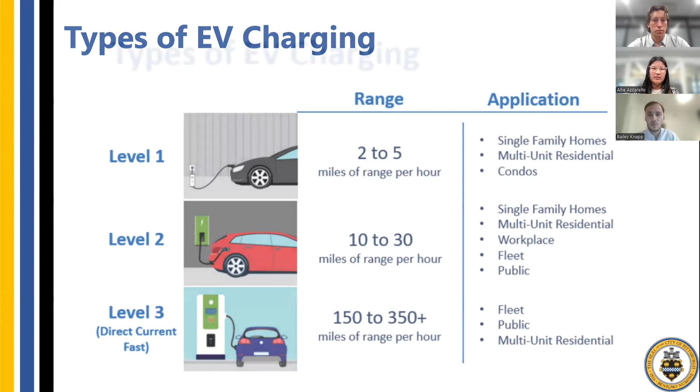We have a charging program and fleet service that we give out to Duquesne Light customers, and we work to partner with governments and community organizations. Our program is really built to cover a lot of the infrastructure costs related to actually doing these charger station programs, and this is the partnership we have with the city of Pittsburgh here. On the CFI grant that was done, we provided match dollars on a certain amount of projects, and then for the whole total we're providing technical support and project management for the rest.

Regarding the charger speeds, the level 1s are very slow charging, 2 to 5 miles per hour. I like to say it's the same power that comes to charge your phone or use your toaster in the morning. Then you really kick up to those level 2s. Those are the ones you'd actually have an electrician come out and install in your house. That's more of an upgraded power, and this is what we would be looking to actually install at the Oakland site here.

I looked at other charger stations also in the area, and a lot of them are 7.2 kilowatts, which is about overnight, like 8 to 9 hours of charging. You see them really in the UPMC hospitals in the area, and then also the parking garages have them. I didn't see many accessible open ones to the general public, except maybe over by the botanical gardens. I might need to fact check this, but I think we're looking at 19.2s for this area, so these will actually be one of the faster community chargers and open to the whole public in the area.

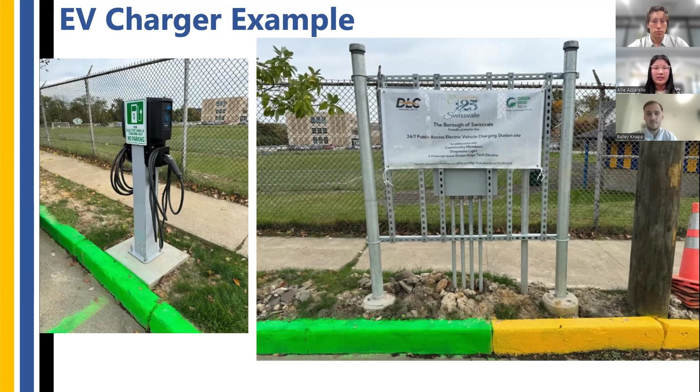Some other pictures on the left, examples of what the chargers could look like in a parking lot, like some of the park locations that we have, or the PPA surface lots. In these pictures too, you can see just a general idea of what the charging stations look like. They're pretty tall, but they're slim.

The picture on the left is an example of the type of charger we are looking at installing for the CFI project. Again, you can see the dual ports on it, charging 2 cars at once. And these chargers are about 6 feet in height.

Okay, over to me. Thank you, Allie and Bailey. So then the next question is how did we choose these locations to install and apply for the grant?

At the time of writing the grant, it was under the Biden administration's built infrastructure plans, and there was a lot of focus on equity. So these are some maps showing inequity measures within our city. We had to overlay that with existing charge ports, using a website called plugshare.com, a free community-sourced website that shows all the chargers within your region. Overlaying that with these equity measures, as well as the federal equity measures for Justice 40 neighborhoods, we determined we needed to hit a certain percentage—I think it was 40%—in Justice 40 areas. That's how we came up with our distribution.

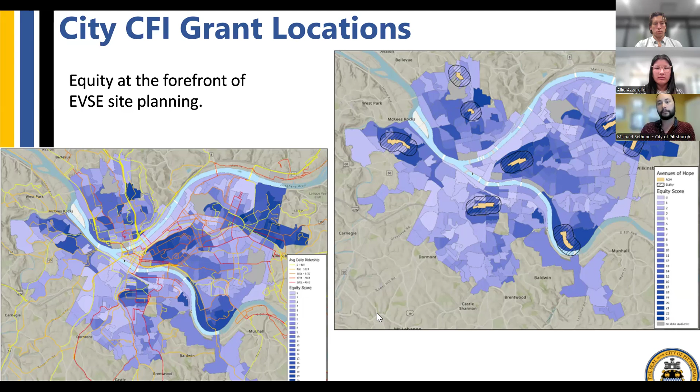Next slide, please. Sorry, I don't know what happened. Okay, sorry. Oh, there we go.

Those lots in particular were chosen because they don't have boom gate access. Essentially, the grant said you need to be able to drive in and up to a charger 24/7, 365 days a year. Obviously, surface lots without a boom gate allow for that.

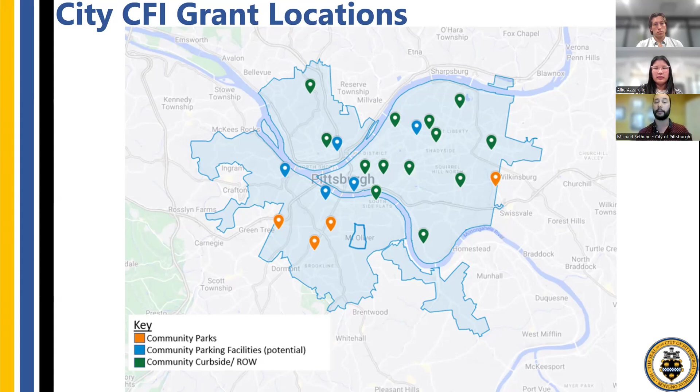Next slide, please. This is, again, in partnership with Duquesne Light, who identified feasible transformers around the city. This site was chosen—it hit a lot of the other grant ideals, public use, public access, and also importantly, it had the pre-built infrastructure, the transformer, right there ready to go.

Next slide. That was the end of the majority of our presentation, but I just wanted to quickly mention PGH 2050, which is Pittsburgh's first ever citywide comprehensive plan. This plan expresses a holistic, community-wide vision for the city's future. It helps city government and its citizens plan for and guide how the city grows and makes improvements, and develops goals and policies related to the range of land use, city services, and quality of life topics. This plan is grounded in climate justice and just transition principles, and we're aiming to proactively better Pittsburgh for all of its residents.

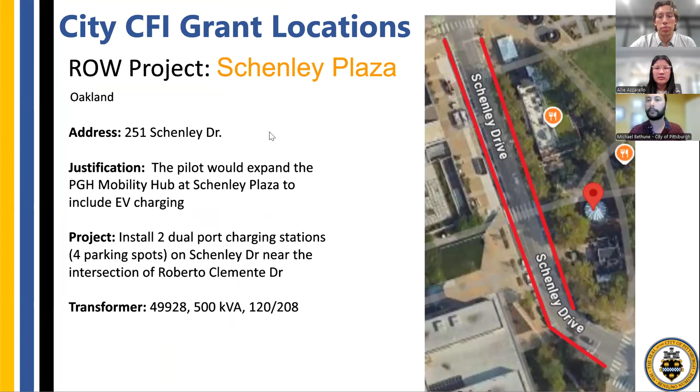It looks like there's a question in the chat. Where along that block will the charger be installed?

Perhaps, Allie, if you did have the Google Maps open, that would be super helpful. But there is a crosswalk right there, on the south side, I think, of the porch. You can see the crosswalk there.

Some of the constraints around the placement of chargers is that we need to adhere to ADA requirements. Essentially, is there a ramp that somebody could feasibly get out of a vehicle in a wheelchair and roll around to grab the charger from the sidewalk and then plug into their vehicle? So we're looking for locations that are not only close to existing transformers, but also ones that have pre-existing curb cuts. Given that there's a crosswalk there, that does qualify as an ADA accessible ramp.

So we'll be looking to put at least one of the units right there to hit the ADA requirements of the grant. And then likely, depending on space that we have, potentially the other one, which would service the remaining two vehicles, just slightly further down towards that intersection, probably about just to the right of where the E is in Schenley Drive there on the right-hand side.

We have been out there with some measuring tapes already and just doing a bit of an initial site inspection with our Duquesne Light partners, but that's what we're thinking.

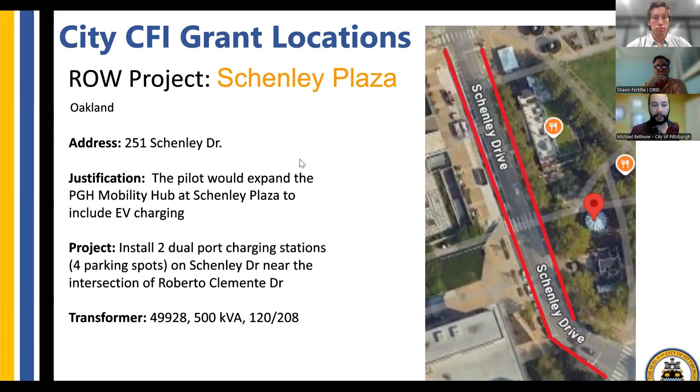Perhaps, Allie, if I could just go ahead and share my screen, I can do it. Do I have access? Yeah, AJ's getting it. Not sure it's come through yet. Here, I can pull it up. If you just want to go to that Google Street View that we were talking about.

While you're looking that up, do you already have this funding? Yes. We were very fortunate in that we got the paperwork in before there was the change in the federal administration. Some folks missed out on their grant funding agreements being signed, but we were lucky enough to quickly get that in, I think it was around January 9th, early January. Congratulations. Yeah, thank you, this was one that got across the line.

If you could just click up to the left there on the street view, towards the crosswalk. A little bit more, and spin to the right now. So that crosswalk, as you can see, with that silver, I guess it's some kind of Toyota, that gap there would qualify as an ADA ramp.

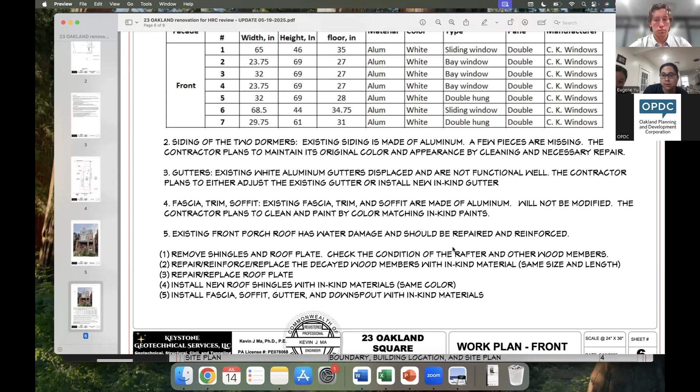Here's some of the items we detailed that we plan to paint the same color white again, right here. We might be replacing the gutter with a similar or like gutter, this will be determined at the time of work.

Here's a side of the building. On the side, we plan to do some window replacement as well, and there's some siding we want to replace with bricks, such as this one right here. The previous owner had done some very janky fill-in work, and we just want to fill it in with brick so it looks a little better. Other than that, we do plan to replace all these aluminum windows with aluminum windows again.

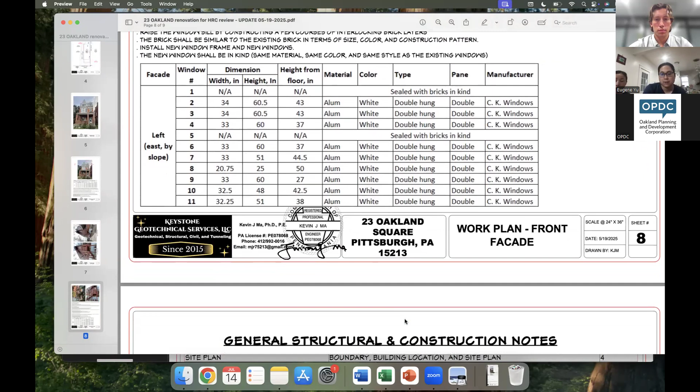Here's all the detailed windows. I don't have as glorious a presentation as the previous parking project or the EV charging station, but we're just seeking approval for all this exterior work so we can make it look nice and presentable for the neighborhood. We really aren't changing anything from a looks perspective, mainly just updating the worn elements.

I don't know if that explains our project, we're just seeking approval from the neighborhood association. I think there's a historical review committee in a couple weeks, and we need approval from here first before we can go to that next portion. So yeah, that's kind of the exterior project we have.

Any questions or comments? Was there an invitation given to anybody from the historic review section at DCP to attend the meeting? Because there are design guidelines for the historic district, and I just want to make sure that we're providing the same information that we want to obtain.

Yeah, thank you for that question. I don't believe anyone from the Public Realm Division, which deals with historic districts, was invited to this meeting. But if that is something that would be helpful to share, after, we can definitely do that, or I can have them draft something together.

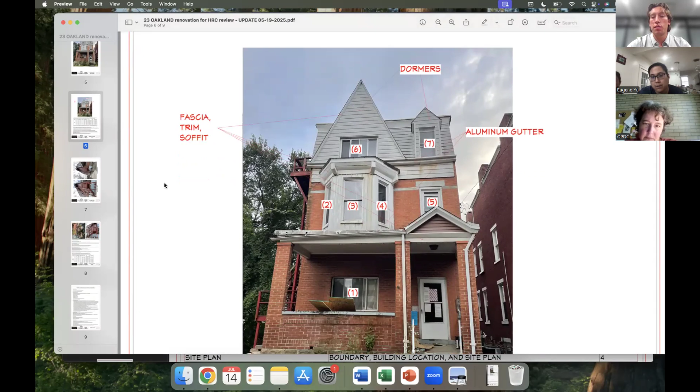For anyone in attendance that may be a little confused, it's usually exterior work on single family homes that is not presented or does not require a development activities meeting. This one does because it falls within a historic district, and there are historic district guidelines that exterior renovations have to follow. I believe that is on the city's website, and I can try to get the link to send in the chat.

I think it's been sent to them before. I don't know how it ended up here, but we were told by someone from HRC to come here first. Oh yes, no, that is correct. Right, you do need to attend a development activities meeting.

I was just mentioning that this project, for example, is kind of like a special case. Typically, homes in non-historic districts would not have to go through this meeting, but because you are within a historic district, yes, this meeting needs to be completed before going to Historic Review Commission. But yeah, we can open it up if there are any questions or concerns.

Yeah, we have a couple questions from the porch about 23 Oakland Square, and just for context, I'll show you where we are, which is right across the street from the house in question. Let me see if I can get it in there. How are we doing? Maybe not so great, but anyway, we live right across the street. I'm here with some neighbors. We do have a train going by, so I'll apologize for a little bit of noise.

So Eugene, a couple of factual things you mentioned. You said you will be replacing the windows, which in fact, some of the windows have already been replaced, and they're replaced with American Craftsman vinyl windows. So I know last time we were in court in front of Magistrate Riccardi, there was lots of assurances: we will be a good neighbor, we will do a good job. And I don't know what's in your heart and your mind. I can only see what's happening across the street from me.

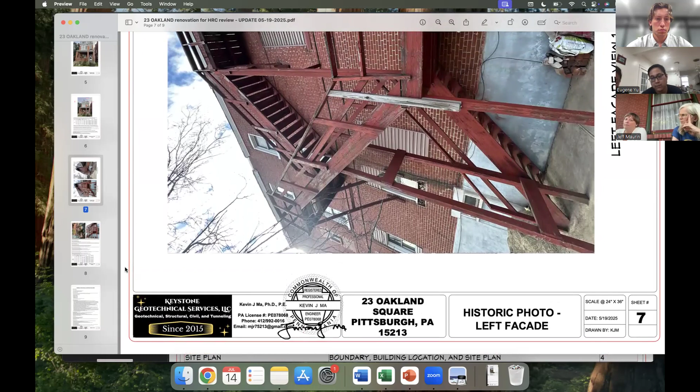Okay, so it sounds like the fire escape will be replaced in kind.

How about the rear extension addition of the property, that is currently now in siding and windows? Can you tell me a little bit more about that? Can you look at my computer screen and talk about these windows right here? No, keep going. That's the siding right here. Which side is this? I'm looking at the exterior of the property. I'm not seeing it. This is the side. That's the side, correct. What about the exterior, or the HRC, or the back of the property?

The HRC only deals with the front and the side. The back has nothing to do with anything here. Actually, our neighbors actually had to get historic review commission approval for replacing a rear porch because it is visible from the street, from Anderson Bridge.

The rear porch or the rear porch windows? What are you talking about? I'm talking about the rear of the building that you can see from the Anderson Bridge.

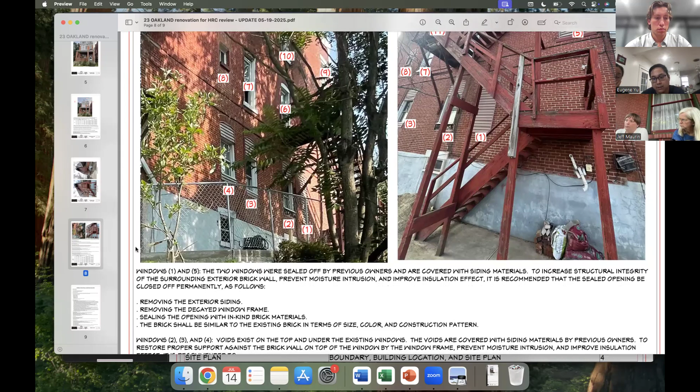There are no plans to really replace or damage repair. We're only allowed to do minor repairs that have no visual impact on the back there. He says the glass back there has failed - it's plexiglass, not real glass. And we might have to remove that and put windows there, or like-kind new plexiglass that was already there.

And the aluminum siding is just going to be painted or left as is, that correct? Yes, that's correct. Painted or left as is, white.

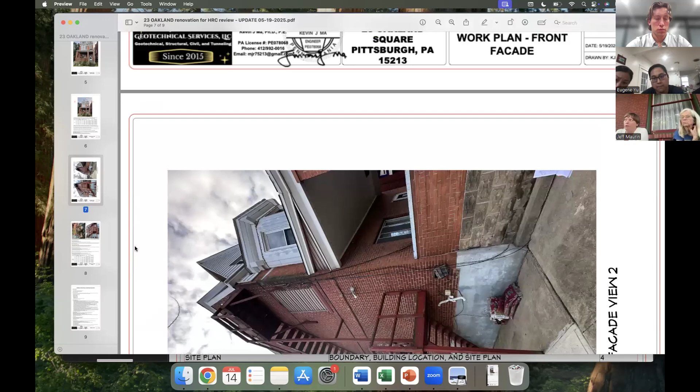Okay, what about, I know it's not construction, but the front yard is currently being used as a parking pad right now, which is a challenge for us. Are you talking about right in front of the house or the side of the house? The front of the house.

The parking pad is being used for the dumpster, and they're parking their vehicles in the front yard over the grass.

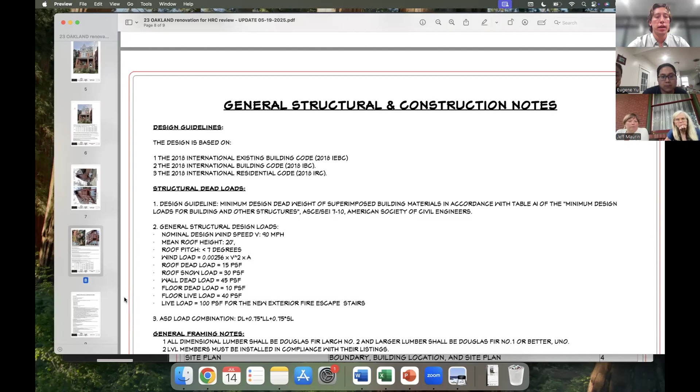Okay, the purpose for this development activities meeting - let's stay focused for the scope of this project. But yeah, if there were to be future changes, a new roof, or any other future project, that would also require a development activities meeting, so we would have a future conversation.

We can put it as part in - if we can talk to the owners and think they're willing to do so, if we can get approval this time around.

I mean, I know the main thing is as long as HRC will - yeah, I mean if you replace in kind, then they will approve.

Okay, well I'll just ask to put an additional part for the next meeting, for the HRC meeting, that will make sure we bring this up for this matter of the shingles. Thank you for pointing this out. Okay.

So yeah, that's kind of everything. Just so everything's clear, you're not looking at any additional pointing, everything is okay with the mortar? The pointing seems to look okay. Maybe I'm blind, but you can just tell me there's no plans to touch it.

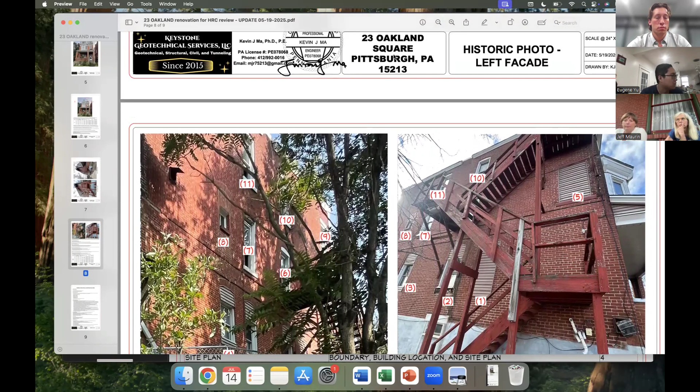I mean, obviously painting brick is not allowed, but they want to bring it up if you guys would be okay with it, because they think the brick is kind of ugly. But it's up to you guys.

Well, it would have to be in the application. It's not up to us, it's whether or not it gets approved. If at this point you can't paint the brick, then it needs to be in your application. At this point they don't really have any plans to, but they just threw it out there since you brought it up.

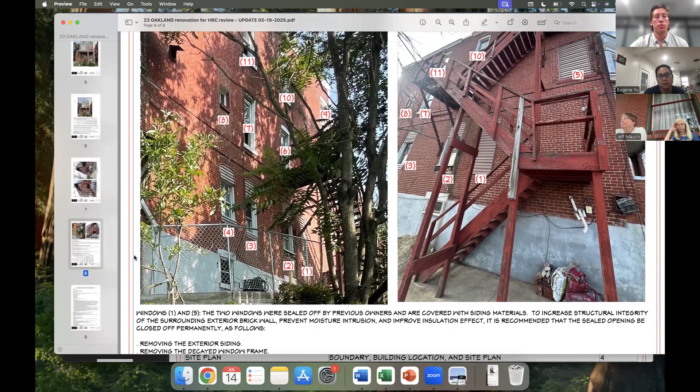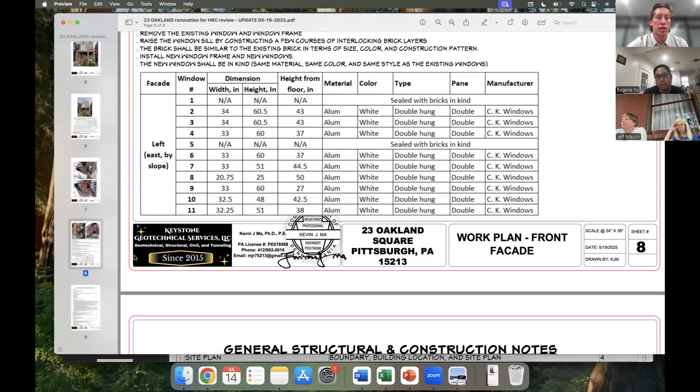Just to clarify, this meeting is meant to connect developers or applicants with residents and community organizations. But the Historic Review Commission, which you have plans to meet with, will be the group that makes the decisions related to the historic district. So if that's a discussion you'd like to have with them, you can do so when you meet with the Historic Review Commission.

I want to hold everyone else on this. So can we schedule time for the HRC, because we're supposed to have this meeting first, and then the neighbors can join again with any complaints or thoughts they want to improve. Their ears are all open. Does that sound good?

The natural procedure here is that there is this public meeting in which there is the opportunity to ask these kinds of questions. At the Historic Review Commission hearing, the public is not able to address questions directly to you. They can provide testimony to the commission the same way that you will. But this is the means by which people can actually ask you questions and more information can be received.

I know it's a little presumptuous of me to say this, but it seems to me like you could get farther in this process if you don't treat approval either as a foregone conclusion or as a mere administrative hurdle, because the guidelines were arrived at after a lot of discussion and planning. There have been proposed changes to people's houses in the historic district that have in fact not been approved. It isn't just like, if you'll just approve this stuff. It's an open question whether or not the Historic Review Commission will regard your proposal as being consistent with the historic review guidelines for this particular district.

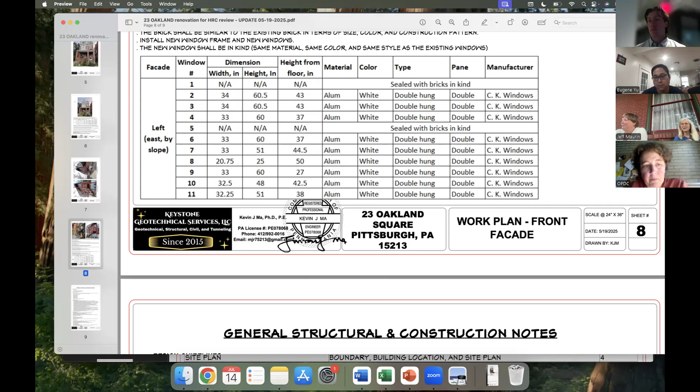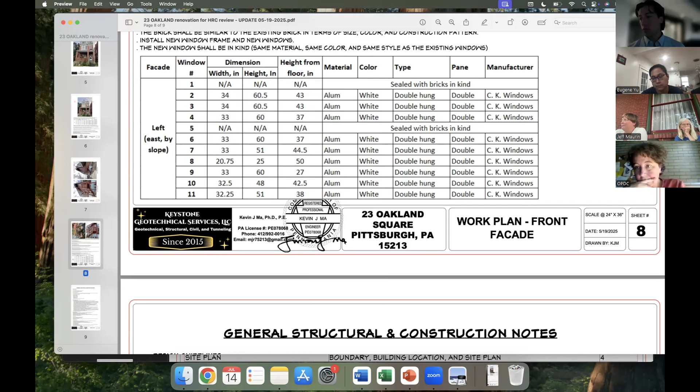But back to your question, our focus now should be the exterior. Past defines the present and the future. I've not seen anything on that house done that considers this neighborhood. Not once. We've gone to a million hearings, and at the end everybody's going to do their thing, and then it just floats off and things get done the way they want. So if you think I'm impatient and you think I don't have a good reason, I do. I don't trust your intentions because I've not seen them follow through over 3.5 years. And I live here. I'm not an absentee landlord or an absentee renter. I live here and raised a family.

I understand. No, you don't. Okay, we're going to try and keep this civil and to the point.

I just wanted to add, and I'm not continuing on, a little respect for the neighborhood that you're doing the work in would go an awfully long way. A cleanup of the front, the best you can do while you're doing construction, would go an awfully long way. We would then have trust. We'd trust the people representing the owners, we'd trust the owners. Right now we are so low with that trust level, and it's making the process, no doubt, very difficult for you as well. Just wanted to throw that out.

Thank you very much. Hey, thank you for bringing that up. I'll try to make it a point to them to keep it more clean, because I think that's the biggest pain point for you guys right now. And then once it's a little bit cleaner, make sure the dumpster is used for this house and the construction materials coming out of this house, not for every other home they own in Oakland or wherever, because that is what we're experiencing. It's not coming out of the house. It's rarely coming out of the house. It's coming from trucks all over.